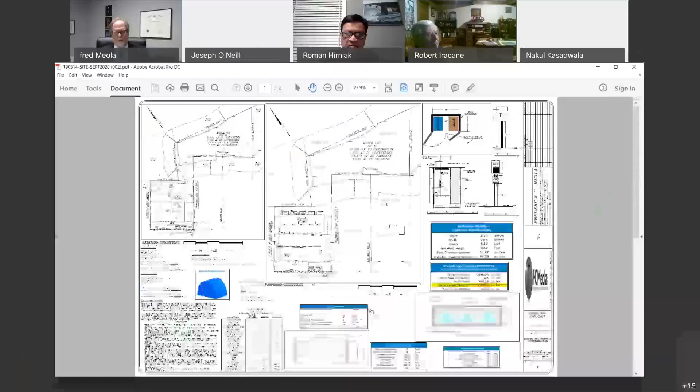And while we're doing that, I'm going to make one correction. It's 18 parking spots, I think I said 19. I apologize.

Okay, John, Joe, you want me to continue? Yes, please. So if you look at the site, you can see the homes are all front entrance garages. There's parking along the homes in front, and then parking on both sides with a large open area for the ability to turn around and maneuver. Plenty of room for a dump truck to pick up the trash and recycling area.

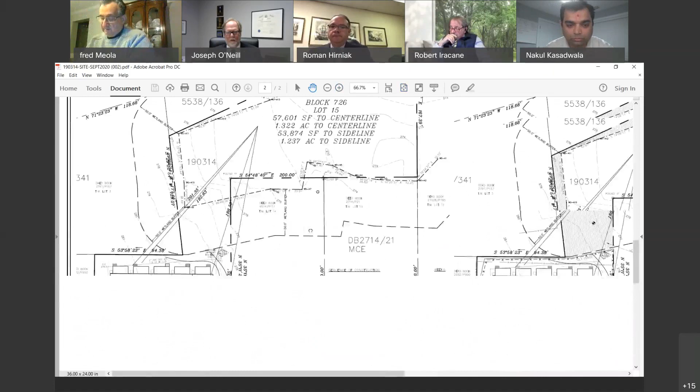The underground detention system is on the next page, John, on the right-hand side, and we have an inlet in the parking lots. Everything is pitched to the inlet to catch all the water and put it into an underground detention system with an overflow that leads towards the rear. The roof leaders for the homes are all connected and go into a riprap area just before the edge of the wetlands buffer, which will keep feeding the wetlands with the water that's always gone that way.

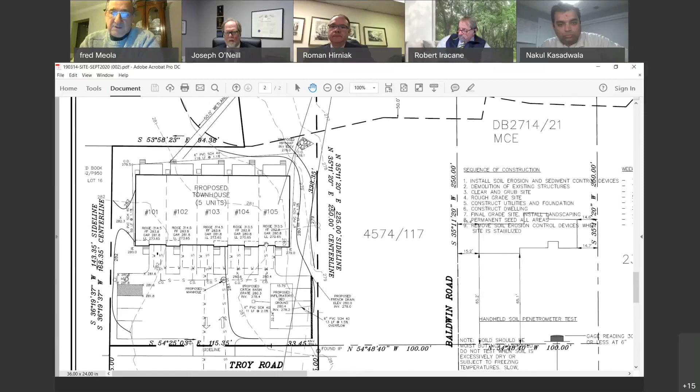Fred, if I may interrupt for a second, can you please define the date of the plans and whether or not it was submitted earlier to the full board? It should be 9/24/20 is the plan we should all be looking at, fourth revision.

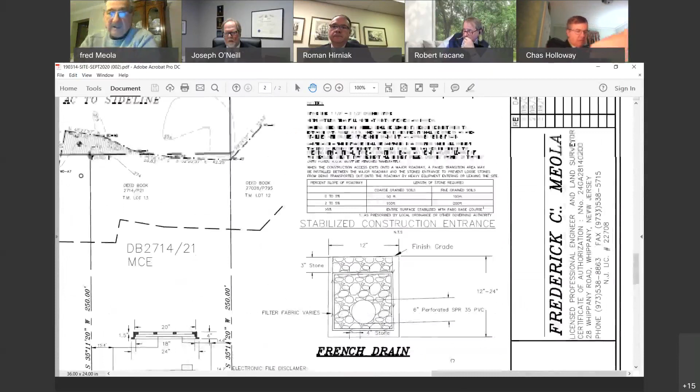So were you all on the same page? John's not—no, John's is older. I can tell. John, what revision are you on? Yes.

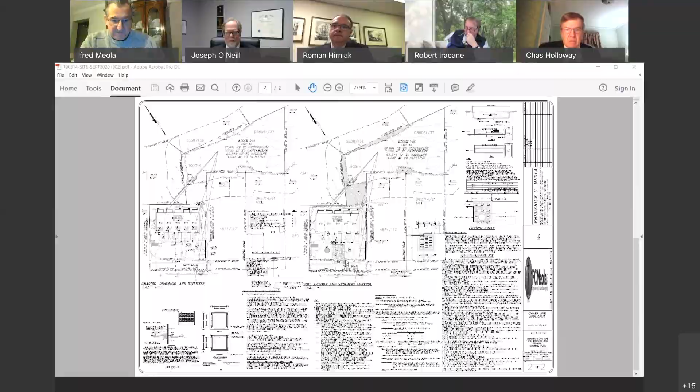The share contact button—oh, wait a minute, hold on. Your contact. Okay, I got to get the drawing again.

Anybody think we would ever be in a situation like this a couple of years ago? How about a year ago? No comment. A couple of years ago, you said we'd all get on tablets. I never thought so.

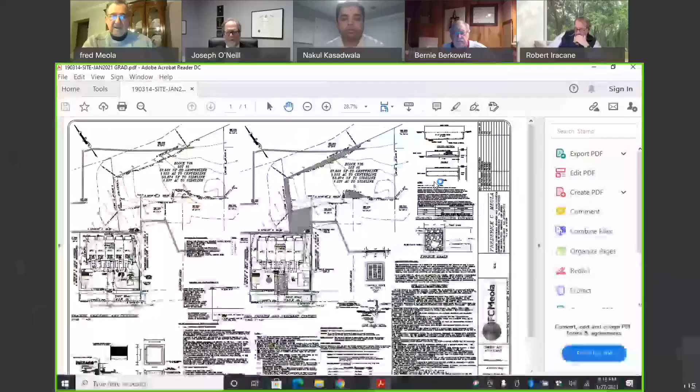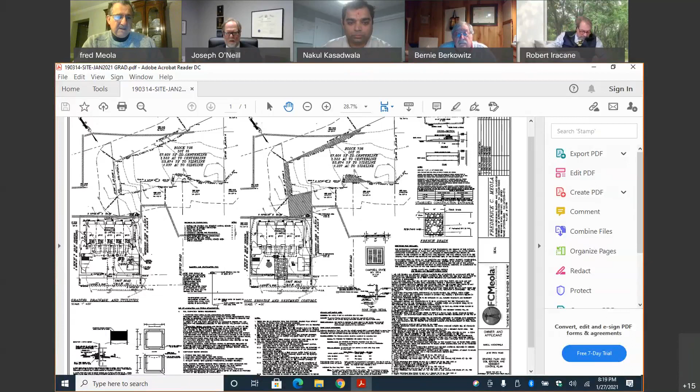This is page 3 of 3. You can see the drainage and grading on the left side, soil erosion protection on the right side and on the right side, and all the details. As I was saying, all the roof leaders are connected by underground piping and drain to the northeast into the wetlands that's on our property. Then the parking lot is collected by a catch basin in the parking lot and led to an underground detention system—we're using the infiltrators.

Sorry, Mr. Meola, it's going to be collected on site. I can see this display, but it looks like one of my grandkids' school art projects. I can't read anything on here.

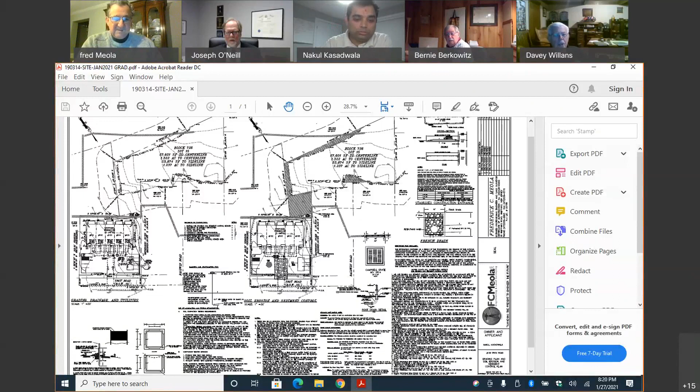So can you use your cursor to point to where you're talking about on this display? Maybe you can make it a little bigger for us, zoom in a bit, that'll help. Yeah, that's what I'm doing. There you go, that's helping. How's that? Is that better? Thank you, okay.

I'm going to move the cursor around again. Here's the pipes connecting all the roof leaders with the riprap overflow out into the wetlands. And then all the parking lot is connected by an inlet in the parking lot. Everything is tilted to that inlet with an underground detention system at that spot.

One silly question. Is there any calculation with the number of structures going in and the water running off all these roofs? How much more water is going into that wetland?

I don't remember if we did outright calculations or not, but the site previously had a horseshoe driveway and a masonry shed. It's obviously more impervious, but I don't know if it's that much more impervious.

The final engineering will be done in connection with the bifurcated site plan, isn't it? Yes, Mr. Meola? Yes, yeah. Thank you, Mr. O'Neill, appreciate it.

Now, Mr. Meola, are there any bulk variances associated with this application? None. We meet all of the requirements for the setbacks in the zone. So the only variance we're asking for is the use.

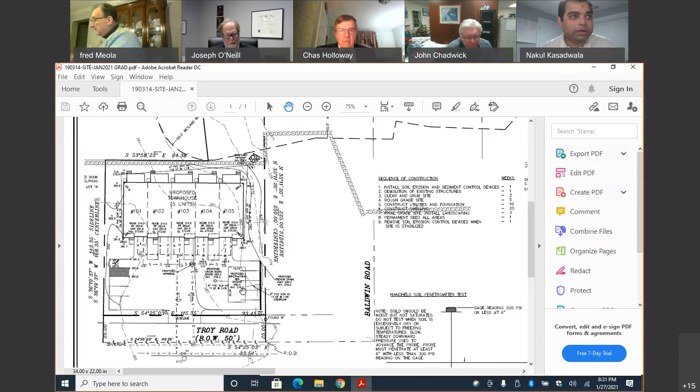Who do you want to be the presenter now? John McDonough. John, I sent you the email with the final approved plan also for the wetland perspective. So if you can be a presenter and show that, it will be great. One second, everybody, I'm just opening up the email here.

So, O'Neill, can I ask a question unrelated at the moment, just for notification? Is there going to be an affordable housing component of this property? No, Mr. Chairman, under section 430-436, this application would be exempt from providing an affordable unit because there's already a single family home on the site. Thank you.

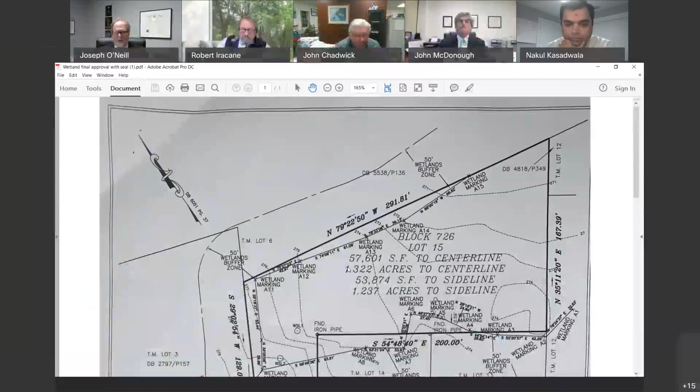Mr. Chairman, while John's getting that email, Mr. O'Neill and I and John McDonough discussed this, and that is contained in the township's regulations. They allow property owners, if there's a house there, to deduct the unit from the ultimate proposal. So in this case, under the affordable housing rules, it's less than 5 and they have no requirement.

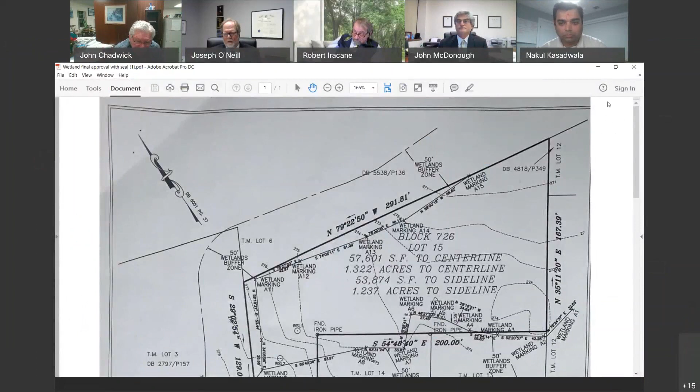On the other hand, they're seeking a use variance, and there's a provision within the statute that you can talk about the fees. The fees on this plan would be 1.5% of the assessed value for affordable housing, which could be increased by 6-fold under that rule. So you're going to need to address that as well. The township ordinance does not address that issue.

So what are you saying, that it's discretionary? There would be some compensation in lieu of a unit, is that what you're saying? Yes. Any residential development, unless it's inclusionary, which means it has a set aside for affordable housing units, pays a developer's fee.

And for residential development, it is the assessed value of the project, building, land, and all improvements, and that's times 1.5%. However, where you have an increase in density, the state affordable housing statute allows for an increase in terms of compensation, meaning developer's fees, which go to the Township Affordable Housing Trust Fund.

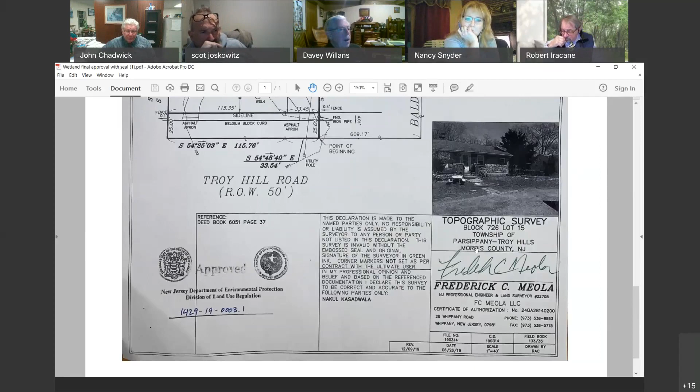I mean, here we are, the applicant's asking us to bulldoze a single family house and intensify the use of that property with a dense development, and everybody's quibbling whether it's major development or not. And if you think about it, if there's no affordable housing component in this, is there really a housing crisis that we have to put up 5 townhouses and knock down a single-family unit? My issue is that I might like the project, and from what I see, I do, but if you gotta pay, you gotta pay. And I don't want to distract Mr. Chairman off this, but looking at the structure, it may not have any bearing on our decisions tonight, but how old is this structure?

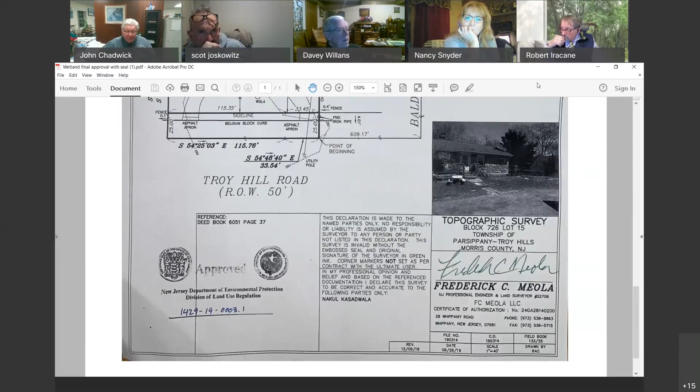The single family home that's there, does anybody know? It looks like it's from the 70s, right? Yeah, it looks like it's before that to me, so that's my question. That's way before the 70s. I was gonna say that's way before the 70s. 50s, 60s. All right, well, it looks good.

Well, no, it does look like that. That was my point. I guess the current owner of the property is obviously not concerned that there's any historic structure preservation issues with bulldozing that property or structure. Right, but the structure that's proposed is definitely not going to be congruent with the street. Well, we can discuss the conditions of the street with Mr. McDonough. We'll show you that that pocket of homes has really no historic value and it's pretty distressed. Okay, thank you, Mr. O'Neill. That's why I would agree with that. Looks that way, just want to check. Thanks. And I live around the block from that area, and that block needs help.

Just to put a fine point on what Mr. Chadwick was saying, we will comply with local regulations and the settlement that was entered into with the township and fair share housing. Mr. Chadwick and I will coordinate as to what exactly that says. What it says is what it says, we're not going to argue with that. We'll comply with whatever fee is necessary to be paid here. But the settlement was drafted up so as to not include every residential development done in town, because when you're doing something this size, the economics don't work out for providing the affordable housing unit. So that's where they drew the line.

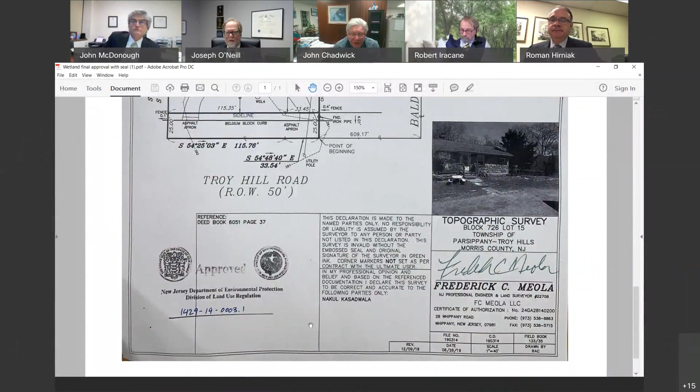Mr. O'Neill, are we switching experts? Can we find a date on this thing? Looking for it, I can't read it. So this is approved sometime in December of 2019.

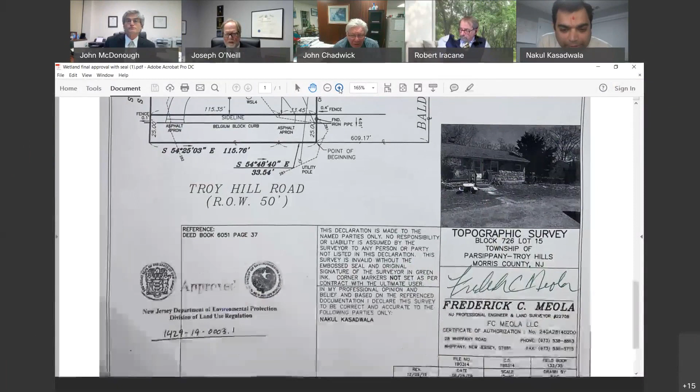If you go to the right side bottom, Mr. McDonough, the date is visible. That's the date of the plan, not the date of the approval. What was the date of the plan? December 2019. Well, you can make a big assumption the approval by DEP was after that, so it's still valid.

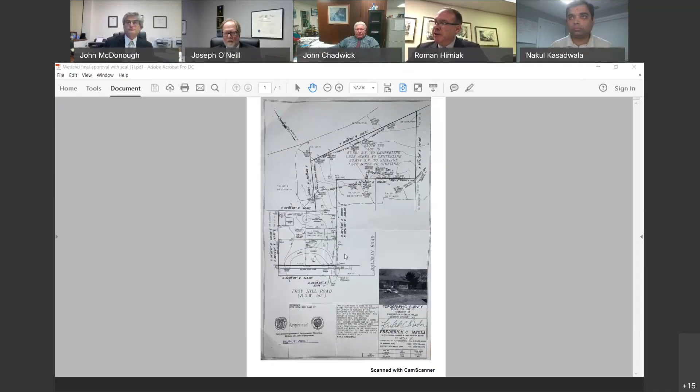Mr. McDonough, I can see you. If you could please raise your right hand. Do you swear that the testimony you're about to give before this board is true, so help you God? Yes, I do. I recognize you, I know you've appeared before this board and testified before it. Since we last saw each other, are your licenses still in full force and effect? Yes, they are.

Before we get into your planning proofs, we're probably going to want to get Mr. Mistry up to show the layout of the plans. But could you discuss the exhibit provided to you by Mr. Kasadwala? Sure, the wetland delineation, letter of interpretation. Mr. Meola could probably elaborate on the specifics, but it is something that has been submitted to DEP in accordance with the wetlands regulations, and in that regard is an official document in terms of the state designation of wetlands on the property.

I'd mark that as Exhibit A2 for this evening. So done. Thank you, Mr. McDonough, we'll get right back to you, but Mr. Mistry's got the beautiful pictures we want to get to. If I could jump back and call Mr. Mistry, Mr. Chairman, if that's all right. Let me ask if there's any members of the public that have questions on testimony given by Mr. Meola or Mr. McDonough. No hands raised. Okay, you can proceed.

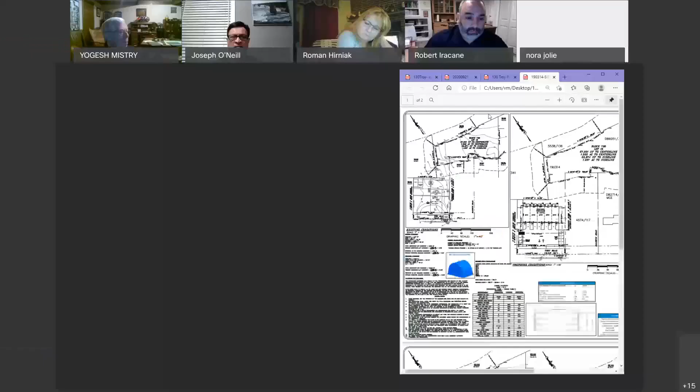Thank you, Mr. O'Neill. Mr. Mistry, could you go ahead and show us these wonderful renderings and layouts you've prepared for this application? Sure, if someone can allow me. Oh, there it is, I'll share my screen here. Can everyone see that? Yeah, it came up.

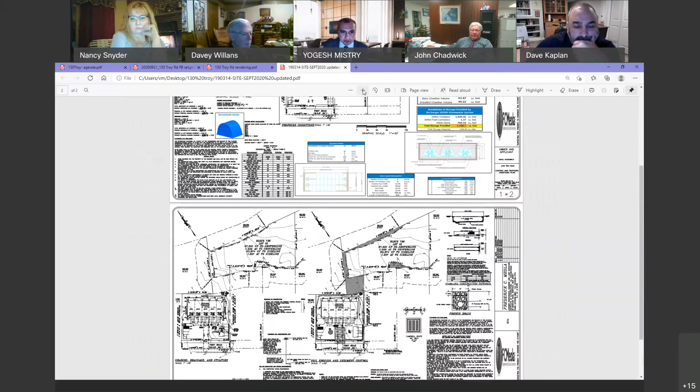The driveway's right down the middle here along Troy, and then the houses or townhouses are directly in front, and that view is kind of looking here. You're seeing these 3 spots, and the entrance is kind of flipped there, but that's the driveway to get into this way, get into the right, and head-on parking for the units there.

If you look at this building, it's backed up to essentially where the old house was. If you look at the old house that's there now, you're about 68 feet there. 68.5 feet. We're at like 70.8. So it's essentially almost the same line.

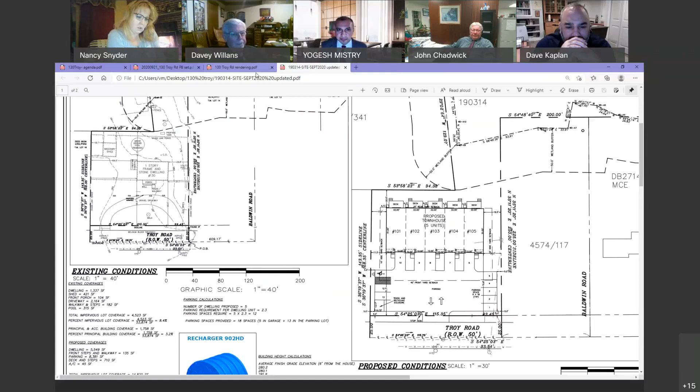I mean, this parking lot really is only for the residents and their visitors, so it's not the general public kind of just driving through this area. You only have one connection onto Troy Road, so I think the frequency of a resident pulling out at the same time as someone else would be minimal. It's not sort of a retail shopping center where you have cars constantly in and out. Residents backing out of the driveways can back away from the parking lot, from the sideline parking, and avoid any potential butting into another car.

You commonly see townhouse developments where driveways are right up against the road, but I think this would be a safer condition. Instead of backing out onto a road, you're backing out into a private parking area and front-ending onto Troy. You pull out, do a K-turn, and go forward onto Troy, versus if Troy Road were right along the driveways, everybody would be backing out onto Troy Road.

Yeah, but on the property itself, it's perpendicular, so everybody's going to be making their own K-turns. Usually in a parking lot situation, everybody's kind of aligned, going in one direction or backing up in one direction.

If you look at the driveway on the right, I'm looking at the driveway on the right. That car has to back out, hook left all the way, and then hook right to go out of the driveway. It's not life or death, but it's a really inconvenient way to get out of that driveway.

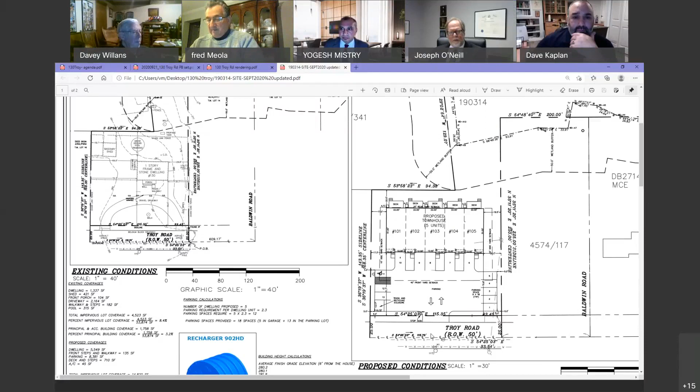Fred, you provided a document. Yeah, I have a property detail report. There's a lot going on in this testimony.

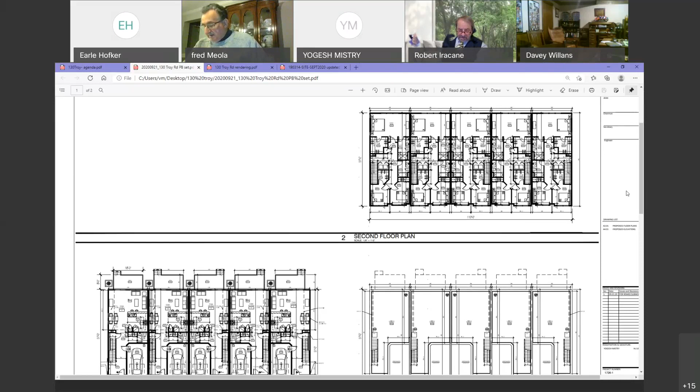Mr. Mistry, let me give you a word of advice for your future plans. After watching that show on Channel 4, they're not called master bedrooms anymore. They're called primary bedrooms or something like that. Master bedroom is politically incorrect. Yes, master, it doesn't bother me, but they make a point of it. Just a little aside, nothing critical.

Yeah, I read that myself too. I think this plan was done prior to that reading, but I did. There were some other things in that article too, can't remember exactly, but yeah.

I guess master bath is also a no. Even his and hers closet is a no-no. Yes. I think they're supposed to be nondescript, or whatever, big and small. Well, you can't name it until they declare what they are. That's why they're all new.

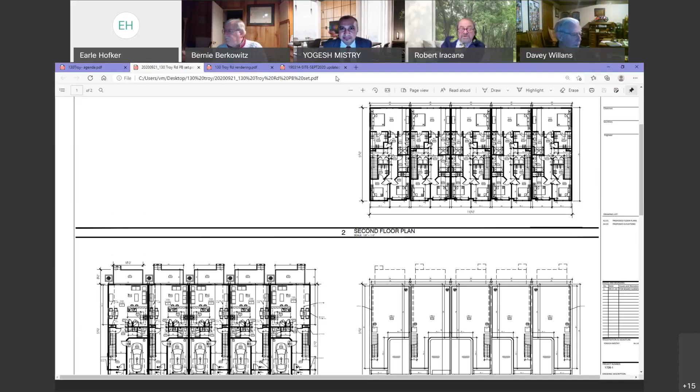You're the best, Earle, you've got this whole thing under control. I'm trying.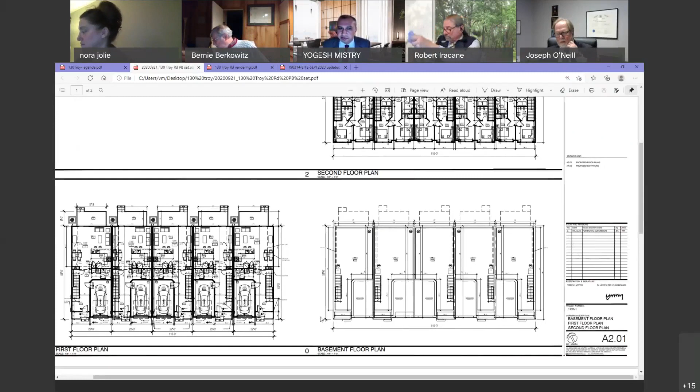I'm not sure if there were any more questions for me, or could I describe the layout of the townhomes for us? You have the exhibit up right now? Yeah, I can run through this again. These are just the floor plans. Let me quickly run through this. This drawing is sheet A2.01 of the drawings we had prepared and submitted as part of this application. They're dated 9/21/20. I don't know if you need to mark this, but these were submitted as part of the application.

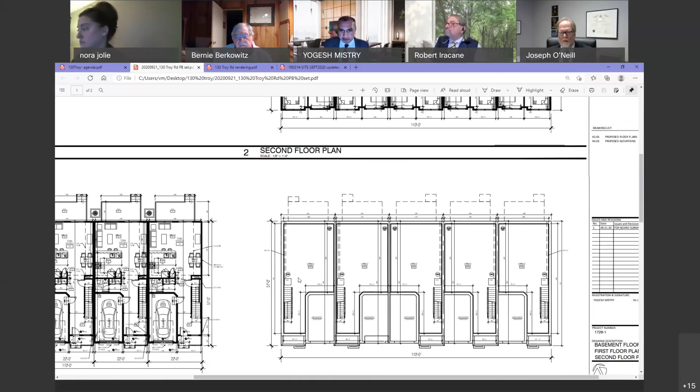So what you're looking at here are the floor plans of the building. On the bottom left it says first floor plan. All the units are either identical or mirrored, but the garage is in the front - you can see the car. You come in, there's a stair that goes to the second floor, and the back end of the townhouse has a kitchen, living area, dining area, and a small deck at the rear. On the second floor, when you come up the stairs, there's a washer dryer closet, the main bedroom with its ensuite bathroom towards the rear, and two bedrooms along the front with a common bath in the middle - they repeat in each unit. On the basement level, there's a portion out for the garage, but the balance is just the utility and storage basement.

Thank you, I have no further questions for this witness. Questions by the board?

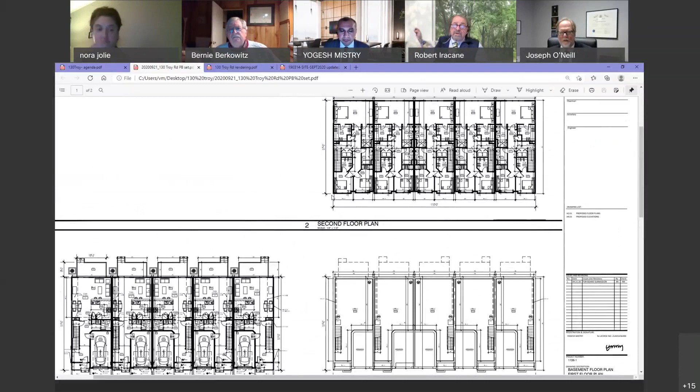Chairman, this is Casey Parikh. Mr. Mistry, is there anything you can do to change the front parking lot, maybe giving some opportunity for landscaping or something? Yeah, I think we could look at that again. That's a little bit more on Fred's work there, but we could look at that together and see if we could provide some kind of island or relief in that pavement area. I think that would be a good thing, as long as the circulation for the vehicles still works.

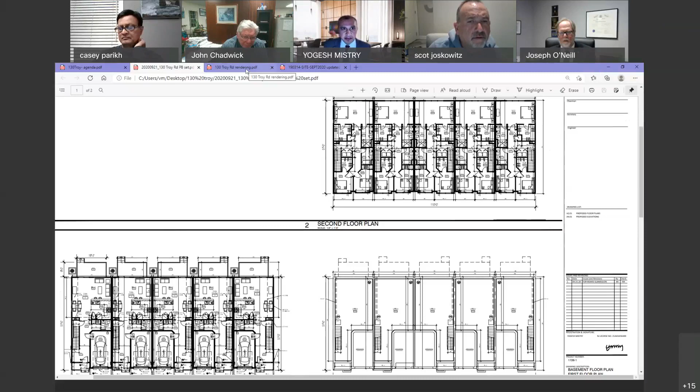Did I also hear at one point someone said there was over parking? Parking wise, we meet the minimum requirements, and I believe we have a couple extra for visitors and so forth. The RSIS requirement is 2 point something for 3 bedrooms, but we're meeting requirements with a couple extra for visitors. If I may - by code, following RSIS, we have 13 spots required, so there are 5 extra spots. We just thought it was good to have the extra parking. But if we want to get some more landscaping and paved area, we can eliminate up to 5 spots and still meet RSIS requirements.

Are you sure about that? Because as I counted in the beginning of your presentation, Mr. Meola, you said 18 spots, and the only way I come up with 18 is if I'm counting the garage space in each unit. Am I miscounting? No, you're absolutely correct. The RSIS code says a garage counts as 1 spot, and you can have 1 spot in front of the garage, so each garage gets you 2 spots - 1 in the garage and 1 right in front of it. And how many bedrooms again per unit? There's 3 bedrooms per unit. We need 2.3 parking spaces per unit with 3 bedrooms. Okay.

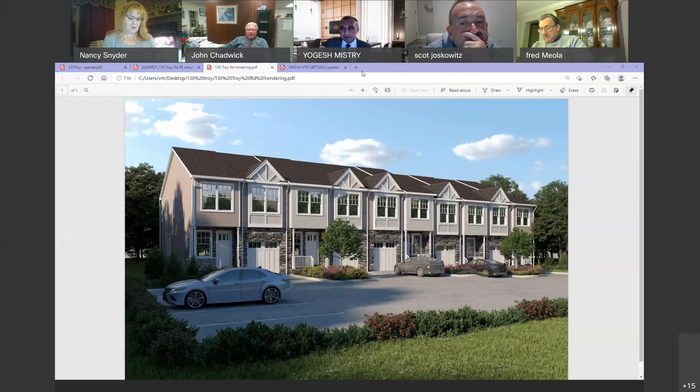Is there any way - I think you're overestimating. How many school kids do we have set up? I wouldn't know the answer to that.

Mr. O'Neill? We'll leave that for discussion with Mr. McDonough. I did have one question regarding whether there are any planned electrical vehicle charging stations proposed. No, there is not, Chaz, but I'm sure they can accommodate them in the garage from the power panels, just like in homes today if somebody has an electric car.

Having gone through a significant amount of applications with regard to certain areas of the town where housing was built, to the extent of the footprint, the building envelope, and having to grant significant variances for decks. If we were to approve this, can we do a deed restriction that would say the decks that are there is all you get? We're not going to entertain any larger decks. Anybody be able to answer that question?

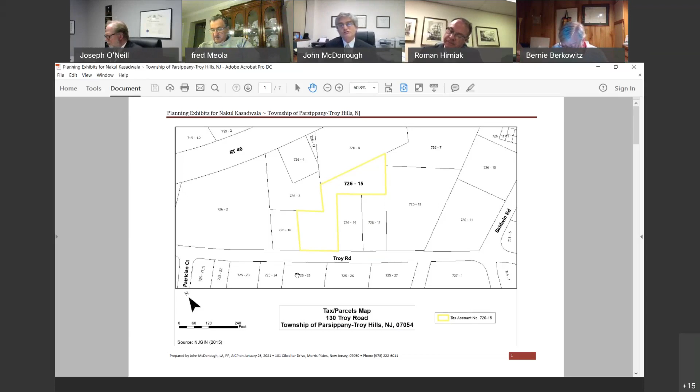So again, for the record, A5 is going to be a 7-part exhibit, and we'll start with the very simple tax parcel map that gives you the geographic configuration of the property outlined in yellow. We're talking about a single tax parcel with a Z-shaped configuration, a very unique shape of property in the context of the surrounding land use. Block 726, lot number 15, with frontage on Troy Road that doesn't quite extend out to Route 46, but has influence of that commercial corridor. This site sort of precedes the build out of the area. If you go back to those aerial photographs, it shows what this area looked like back in the 1940s, which looked a lot different than today. Your tax cards corroborate what Mr. Meola said, that the site was constructed in 1942. Things were a lot different for this home in 1942 than the landscape we look at now.

I'm flipping you to sheet number 2, A5 sheet 2, which is a current aerial photograph representation of the property condition and surrounding land use. The subject property contains a dwelling in the front constructed in 1942, with a semicircular, U-shaped driveway. During its time, if one were to occupy the house, one could look all the way across to the south to where the Mazdabrook development presently is. This was one big cleared field, possibly a farm field. All of the homes on the opposite side of Troy Road and all of the commercial development behind the subject dwelling were not there at that time.

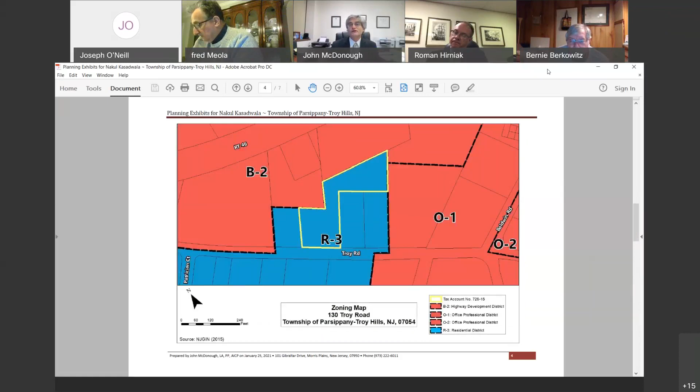What the applicant is proposing here, as you have seen, is an intent to create an attractive new development, something that will provide for new and conventional housing. So to reconcile what the applicant is proposing here with the one variance that is before the board this evening, the applicant is asking the board to move on a use variance to allow a multifamily development, a multifamily residential development in this single-family zone, the R3 zone.

We have actually put together a planning report that puts forth the justification for the use relief. And I know the board has laid condition out there that the actual form of development is something that may be vetted during the site plan process.

In terms of particularly looking at the use, I believe the applicant has given enough adequate evidence to show that the site can accommodate 5 units here. It can be parked with substantial, if not complete, conformance with the bulk requirements of the R3 zone district. The height of that building, the coverage of the building, the parking, the setbacks, all would comply with the requirements of the R3 zone district.

So in terms of the shell, you can always talk about the look and the feel of the building. The shell of the building complies with the mass and the scale of that which could be realized under a conforming single-family house.

With respect to the relief that the applicant is seeking, we've run this through both the statutory positive and negative criteria under the Medici test. And to just put forth what we put in our report that we submitted to the board, we found 4 special reasons that would support the positive criteria.

Mr. McDonough, can you describe the property on either side of this subject property? I'm going to go back to the share screen here, it's a little easier to orient everybody. I'm back to sheet 2 of exhibit A5, the aerial photograph. We probably should have shown more of what's going on further across the street, but that lot immediately opposite, lot 25, looks to me to be undeveloped open space, undeveloped land.

Further to Mr. Berkowitz's question, the two houses, the two properties, does it appear these houses were all built together at the same time? As I look back at the aerial photographs, it looks like there was a triplet here, yes, three houses. The fourth one came online later. But yes, these three houses overlooked what was a very large field at one time. So they're single family houses, all three, correct? All three in a row are single family, correct. I don't know if they're rentals or owner occupied, I didn't research that.

Are they in fact occupied? Yes, the two on either side appear to be occupied. I believe they were owner occupied when the applicant on the corner, the Temple, came. I believe members of the public came and they were owner occupied. Yes, as part of the ISKCON application, I believe that was affirmed then. That's correct.

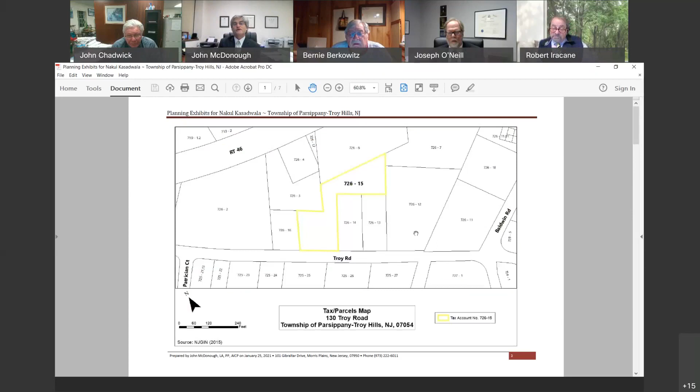And there were houses going out to Baldwin Road at one time that have been recently demolished, isn't that correct? Yes, there were two homes, that's a very good point. There were two homes on the ISKCON property, block 726, lot 12 and lot 11, which were vacant at the time of the ISKCON application, probably about 10 years ago, and have been knocked down since.

Can I just clarify, it's kind of a through road, right? Troy Road didn't end across Baldwin, it continued beyond there, correct? And it was probably a semi-major thoroughfare. Before Route 80 came, I do believe Troy Road carried all the way through, yes.

Mr. McDonough, the view I see is a beautiful picture with a yellow line around it. The property we're discussing faces Troy Road and then backs up. Yes, it backs up to commercial land.

I think, did I lose Bernie? Mr. Willans, I think you went mute. I'm sorry, I didn't mean to. My point being here is we've had residential properties along the side here. Now we have a lot of commercial property. And so... it would be congruent with or consistent with what's going on in this neighborhood. Is that correct? Mr. Willans, I apologize, I only caught pieces of that question. Okay, I'll start over.

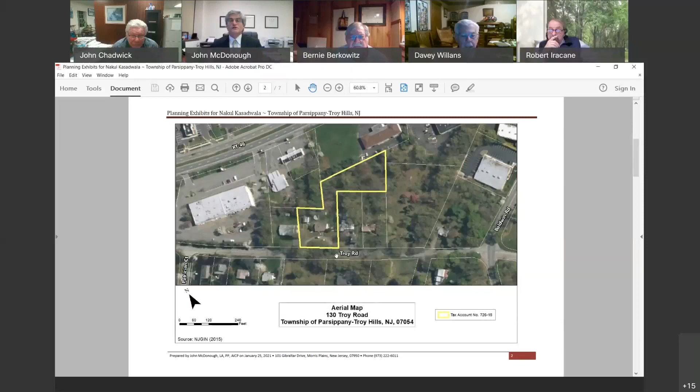Looking at the picture up on my screen right now, which has a yellow line around a lot of property, the subject property we're talking about, and then behind that goes all the way back to property that borders on a lot of industrial. So all this area is converting to commercial area, is that correct? That is correct. I think that comes out in the color coding. Yes, thank you, Mr. McDonough, that was going to be my next point. Everything around this is red, which is commercial, except the property to the left and to the two right.

The people that have the commercial or the residential properties on either side of this property, have they had any exception to this development plan? I have not heard of anything of any issue with it, and I don't know that I'm able to even see if there are other people online. I can tell you, I personally and through the applicant have not heard of any concern. Thank you very much.

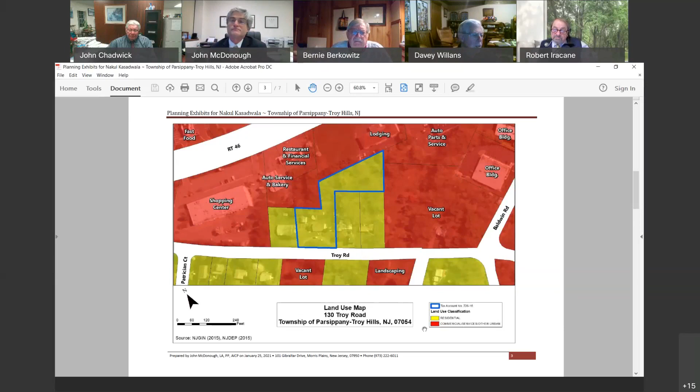So what we're doing is cutting a piece out of the middle of, well, it's 4 residential properties, and converting it to something else, which that's our decision, right? Okay, thank you. Correct. Yeah, I mean, this is Nancy Snyder.

So to that point, one of the important things I think to keep in mind is the fact that this section faces Troy Road. And if I'm not mistaken, that's still a 2-lane road, right? So the red is all facing 46, and of course that's what, a 4-lane highway each way. And so regardless of that, we still have a significant presence of residential areas and lots, despite the red. And again, it's all facing Troy Road.

I don't know, are we looking to—and this is more of a question for the board, and it's rhetorical—but are we looking to make Troy Road a little mini Route 46 for those to cut through and access Baldwin without having to go through the whole 46? We're not asking for some commercial handle. Property, they're not asking for commercial property. Oh, no, I know they're not asking for commercial property.

But a lot of the rationale behind why this is such a great application centers around the fact that the surrounding area is all commercial. And I'm just saying that here we have a lot where right now a single family house is proposed to be demolished for 5 townhomes. I mean, I don't even think we even visited the traffic impact on this 2-lane road, did we?

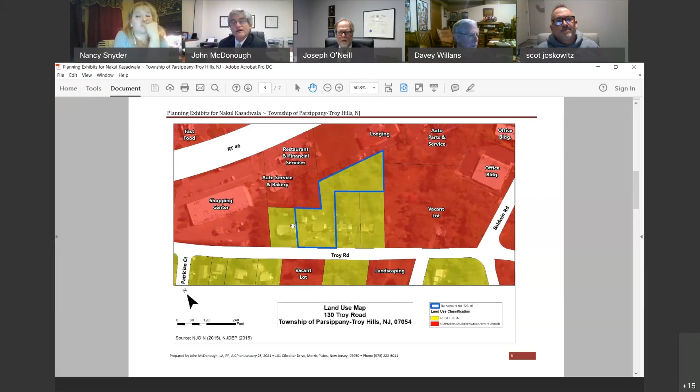Unlike those 2 residences to the east or to the right, which do have some nice depth to them, the subject site has some nice depth to it as well. But in the immediate environs behind the subject site, we have the intrusion, I'll say, of that commercial development that we don't see on the other lots. Certainly that intrusion is there on the newer home to the left as well. But I went back and looked at aerial photographs, and it doesn't really do service in the photograph we're showing now, but whatever the prior land use was, there were cars stacked all in the back here, right up against the common property line.

So I think the point is commercial land use has a direct influence on this particular site that we may not see on the other homes. If we're looking for some sort of distinction between this site and the others, I'll use the phrase we've run into before, a sort of domino effect happening here. I think the board can make a distinction between this lot and the lots adjacent. I agree, there are influences on that single family home similar to what this application is seeing as well. But thank you, Mr. McDonough, that's a good point.

Let's cut back to something Ms. Snyder said about making Troy Road a thoroughfare. Troy Road is a thoroughfare. I don't know if you guys ever travel this around rush hour, but in the old days I used to go to a little strip mall over here, and I would come across Baldwin and go down Troy Road and make the right into the back of the parking lot.

There's a tremendous amount of traffic on Troy Road. The thought that 5 townhomes is going to create a buffer to anything is laughable. I would rather see this whole area go commercial like all the rest of it. You're carving out one little piece of a significantly commercial area and saying, 'Oh, we're going to do wonders for this area by putting 5 townhomes in.' You're not going to do wonders for it. You're not going to change the traffic patterns or anything. People are still going to use Troy Road as a cut through.

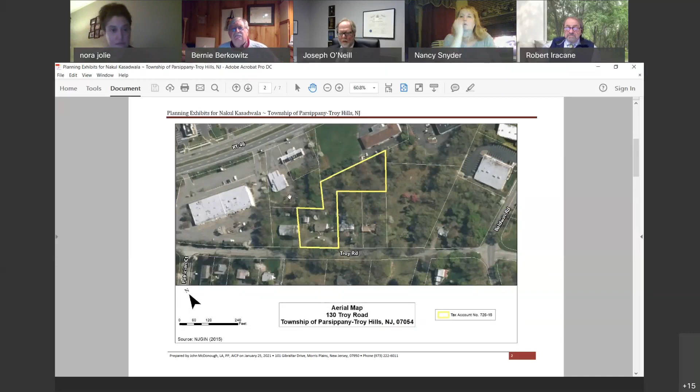Is John still there? Mr. McDonough, can you take the drawing off the screen? I got it, I'm sorry, I muted myself.

I think, Joe, it's really a fee simple condo. Yeah, I need to get that structure straightened out with the client. We'll get that, it's a fee simple condo.

That's the general market. Members of the board, is there anything else you want addressed or more information before the next meeting? I just remember Mr. Chadwick also saying something about affordable housing. Yes, he said that. Okay, I missed that.

Mr. O'Neill, is April 2nd okay? We have to be carried without further notice, Mr. Chairman? Without further notice, and you will give us whatever extensions are required, is that correct? We'll grant all necessary extensions through the end of April.

Mr. Chairman, did we also talk about school district impacts? I asked a question about a projection of how many children come out of 5 townhouses, 5 two-bedroom townhouses. I was kind of like, everybody went deaf and dumb on that question. Well, they're 3-bedroom townhouses. Mr. Chairman, if you'd like me to answer, it's John McDonough for the record. I can tell you what the Rutgers study says in terms of the demographics, it's pretty simple.